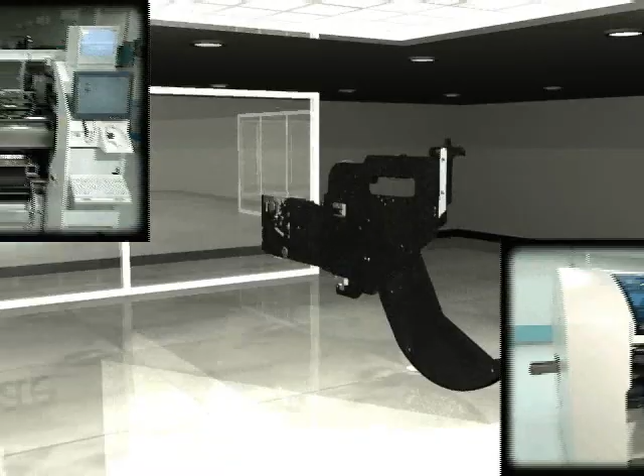Introducing Mirae's new C feeder. Hello. On behalf of the Mirae Corporation, I would like to introduce you to Mirae's new C feeder. Since 1998, Mirae has been creating new and innovative solutions for SMT assembly. The C feeder is Mirae's latest advance in taped component feeding.

In designing the C feeder, Mirae concentrated on three main objectives: ease of use, pick position accuracy and repeatability, and reliability. Now let us look at how Mirae attains these objectives by exploring the C feeder in greater detail.

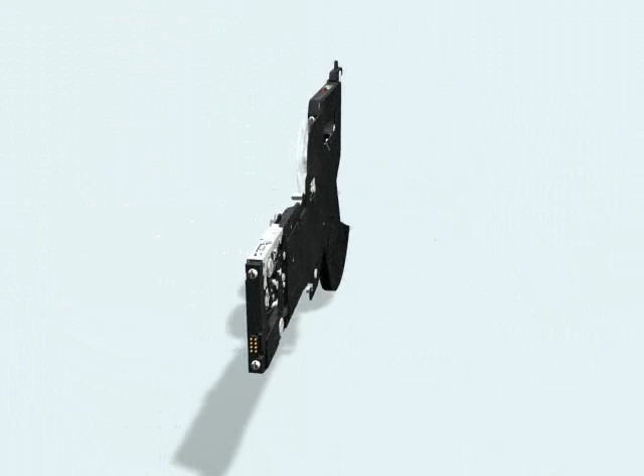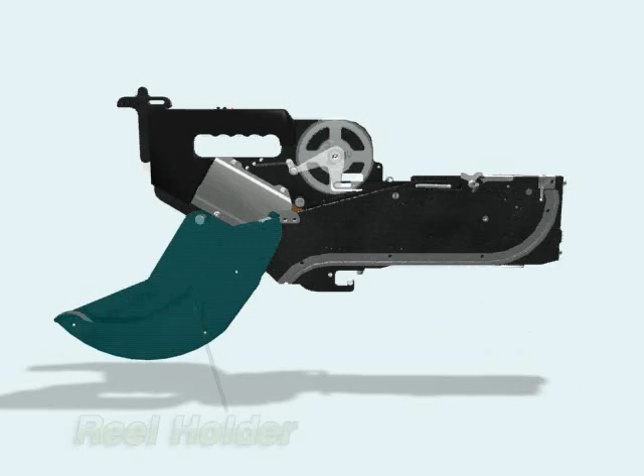The C feeder consists of three main parts: the main body, which contains the tape drive mechanism and control unit, the reel holder, which accommodates the tape component supply reel, and the handle and display unit.

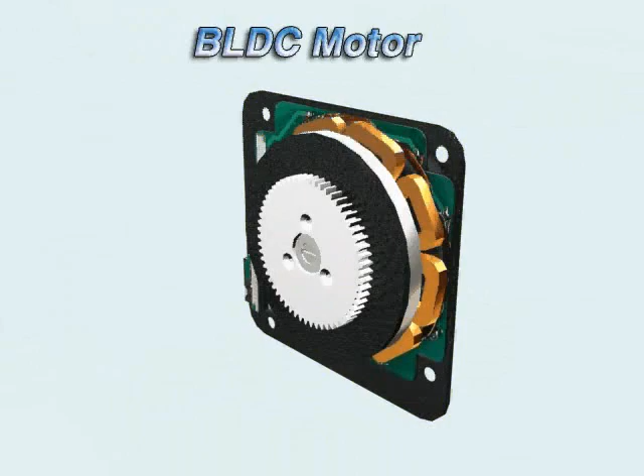Located in the center of the main body is a brushless DC motor that is responsible for reel rotation and the feeding of components. The motor's design is based upon Mirae's years of accumulated knowledge in motor design and is incorporated into the feeder to improve reliability and accuracy.

The brushless DC motor drives a gear that engages a cam structure used to drive the component feeding gear and the shutter, as well as the spent carrier cover take-up reel.

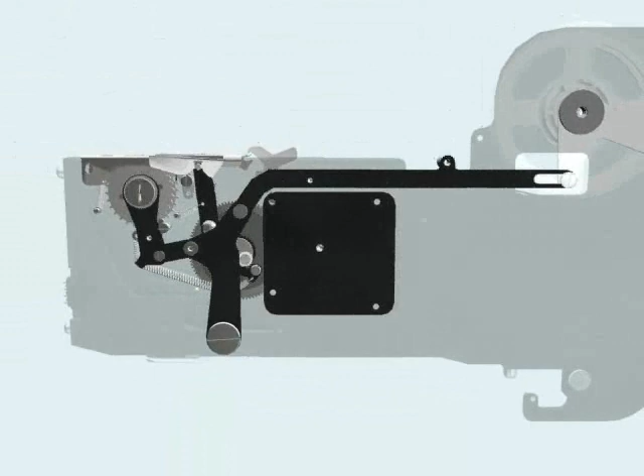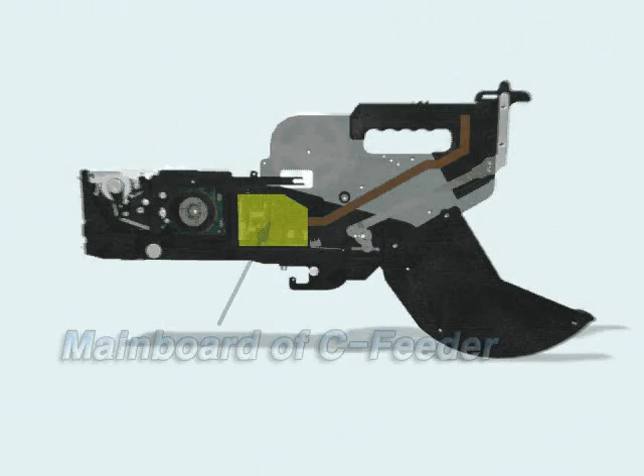The main control board is also located in the main body. The control board controls the operation of the feeder and stores information regarding the component being supplied.

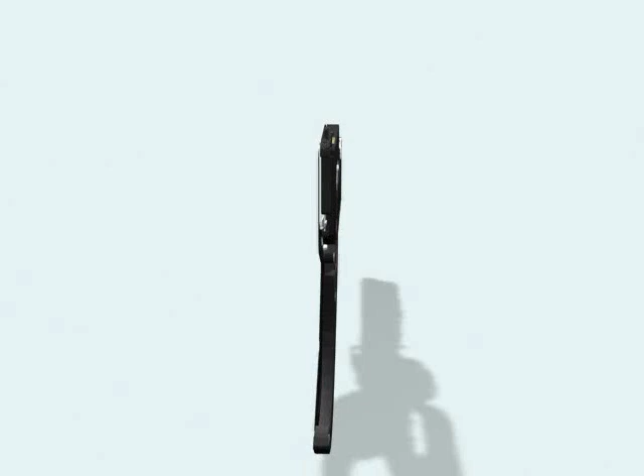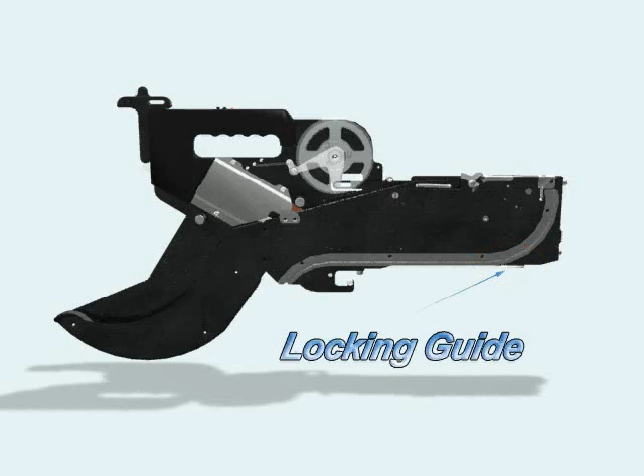The front of the main body contains high-accuracy locating pins and an electroconnector that is used to supply power to the feeder and for communications with the component placement system. A guide to help position the feeder in the feeder base and a locking lever are located below the main body.

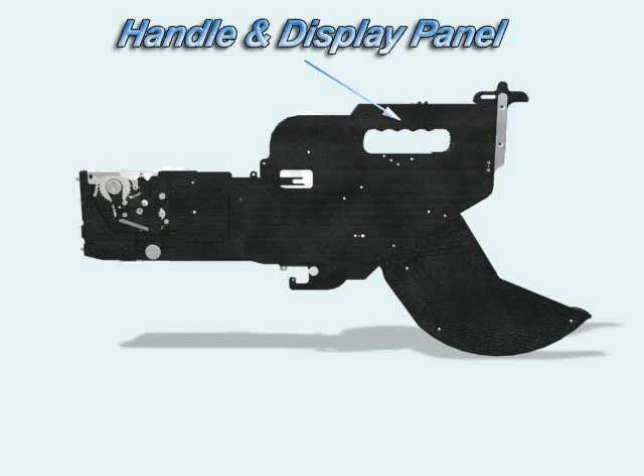The reel holder is responsible for fixing the component supply reel and to provide a smooth supply of components to the feeder. The handle unit is composed of the handle used for carrying the feeder and the locking handle that manipulates the locking lever. It also contains the display unit. The display unit contains a feeder advance button and feeder status LEDs.

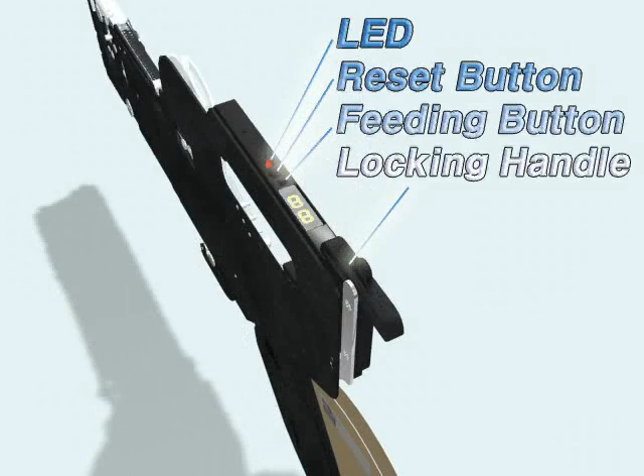The LED display shows the feeder location during the loading operation and is used to display error codes to assist operators during production. Now let's examine the ease in which the C feeder is loaded, programmed, and located into the machine. First, the operator selects the reel of parts to be supplied from the feeder.

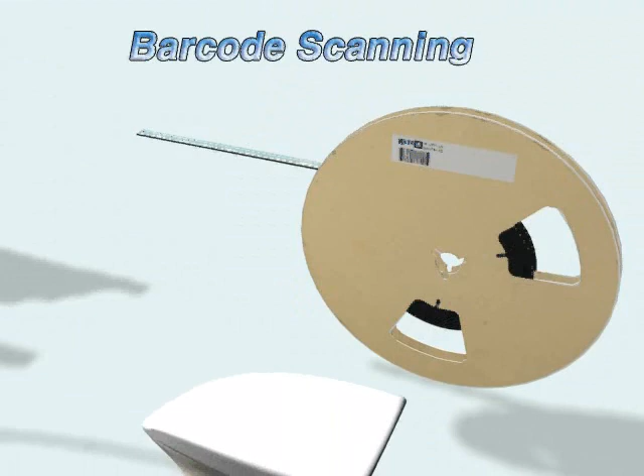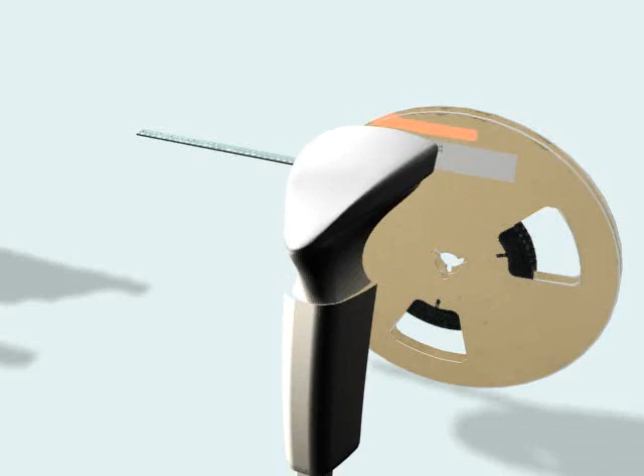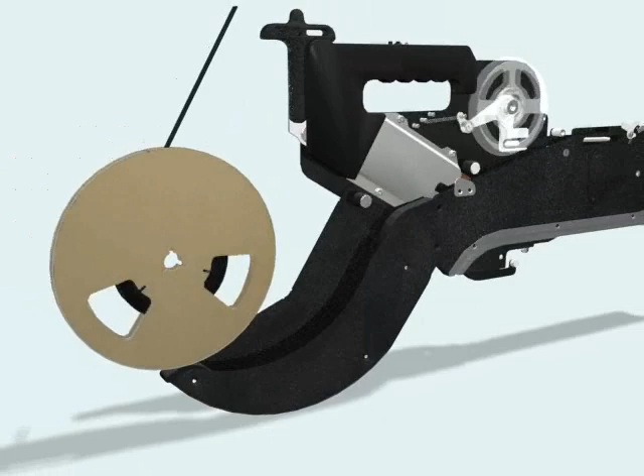A barcode scanner is used to read the barcodes on the tape reel, which contain the part number and initial quantities of parts on the reel. Next, the reel is placed into the reel holder. Threaded along the reel path.

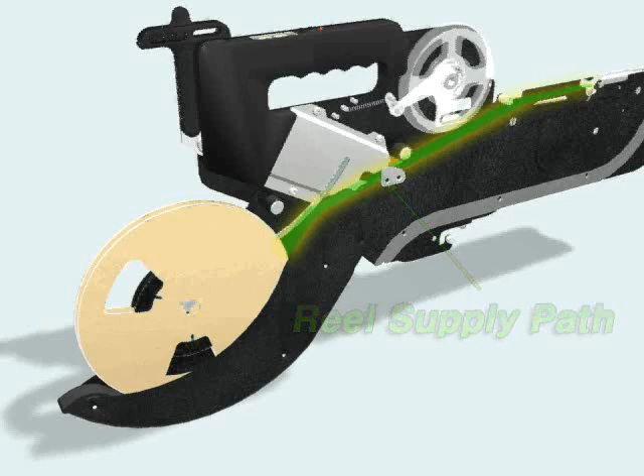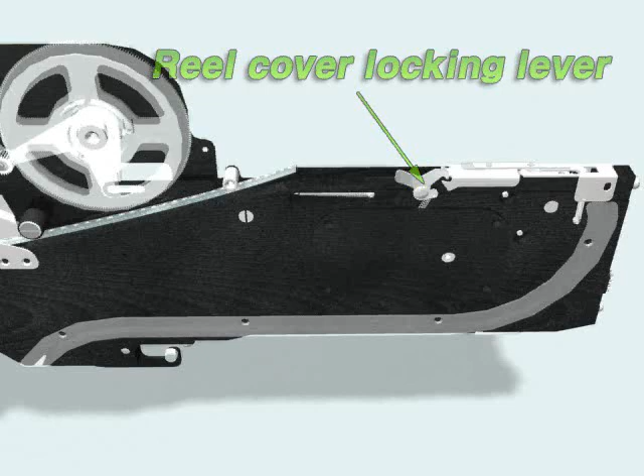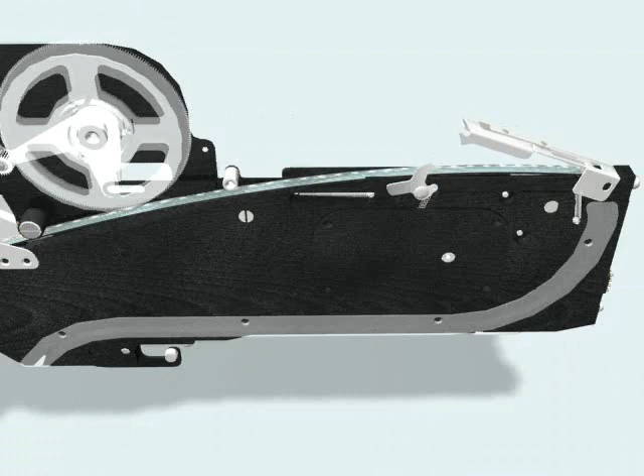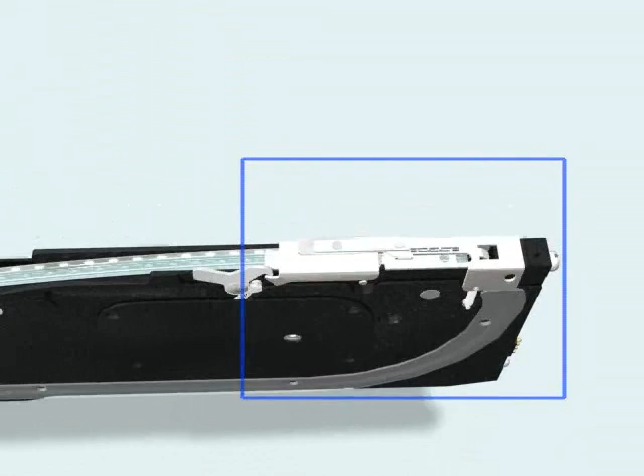Pressing the reel cover lock and release lever opens the reel cover. Tape are aligned with the pins in the feeder, and once in position, the reel cover is closed.

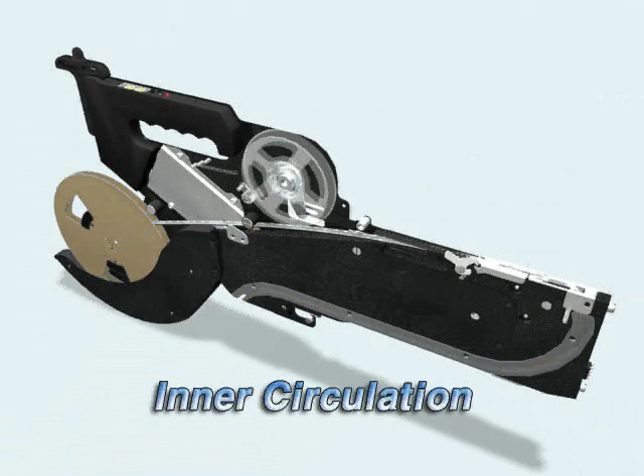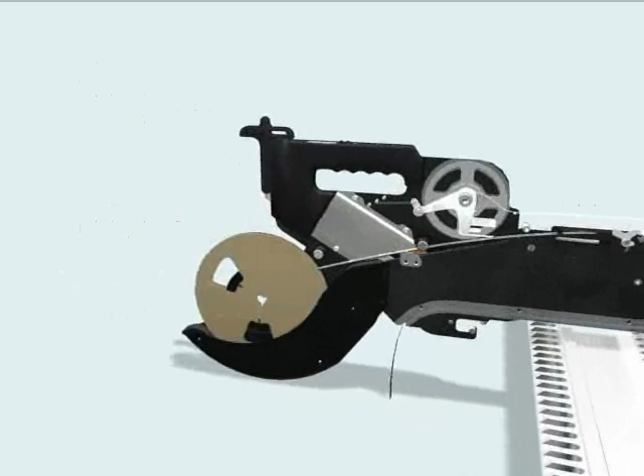The tape cover is routed and attached to the spent cover take-up reel, and the carrier is routed to the spent carrier path. The loaded feeder is then installed into the feeder base. The feeder is locked into position. The 3 location pins and the locking lever establish precise control of the feeder position in the feeder base.

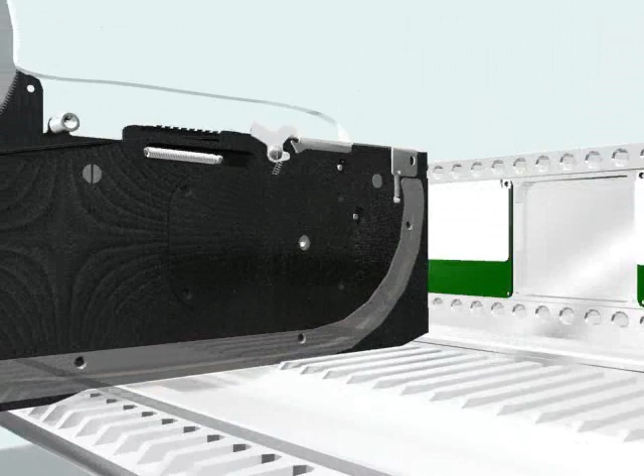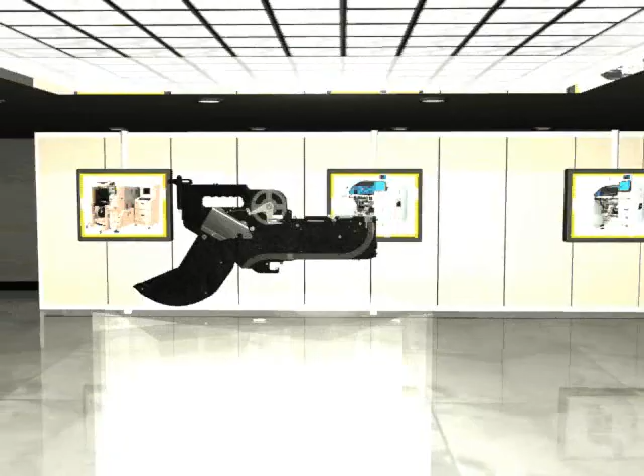Since the feeder is plug and play, as soon as the feeder is installed in the feeder base, power is supplied and communications with the placement system are established. That explains the easy operation of the Mirae C feeder. We hope that you will agree that Mirae's new C feeder provides ease of use, accurate feeding of components, and high reliability. Thank you.